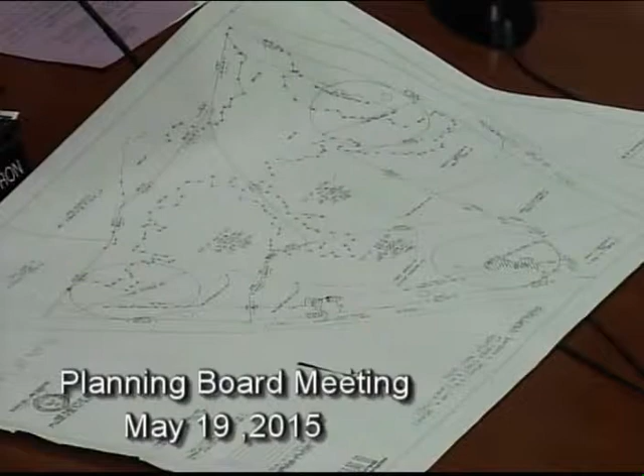No, you've looked at this already, right? Yes. Haven't you? No, this is in the subdivision, isn't it? This lot over here, isn't that what they're putting, are they planning on having a building lot there? No, is that what this is? That's on Massachusetts Avenue — let me just get my orientation, sorry, Steve. Lot 1, lot 3, lot 4.

Yeah, lot 4 is a building lot. But they've got it located within Mass Ave, I think, within Christina Estates, is that right? Yes. Well, Christina Estates, when it was written up, has a restriction as to how many can be built there. So I don't know if you can add another lot to an existing subdivision if it says exactly how many houses are allowed.

Here's a small view of it, John, here. So we'll have to check the Christina Estates restriction. Okay, yeah, we can do that.

So which lot are they trying to create? Are they breaking this up into 3 lots? Yeah. 3 lots? Yes. These 3 here? Yeah, 2 on Turner and 1 on Mass Ave. But unfortunately, the one on Mass Ave is within an existing subdivision that has a restriction as to the number of lots.

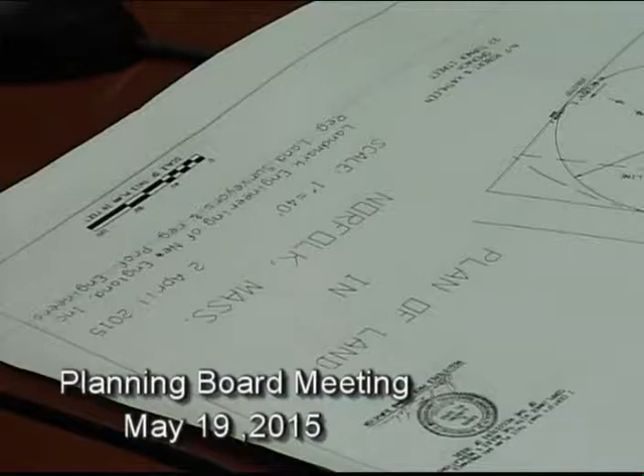As long as it meets the zoning dimensions, you look at this, it's conceivable you could pull a road in through here and put the buildable part in here. It's conceivable to do an estate lot. You could come off Turner Street with a road, just take a little sliver of lot number 2's property and get into lot number 4 from Turner Street, and put your circle up here. Yeah, you just need a driveway, you don't need a road. That's right, driveway.

And that looks like it might be outside Christina Estates as well. Although an estate lot has to be a certain size, what size does an estate lot have to be? Is it 3 times the existing zoning? Yeah, 3.91 acres. Well, this lot 4 is 355 right now, it says.

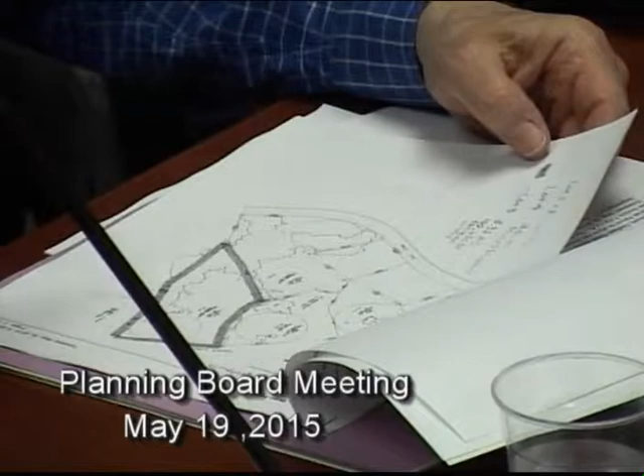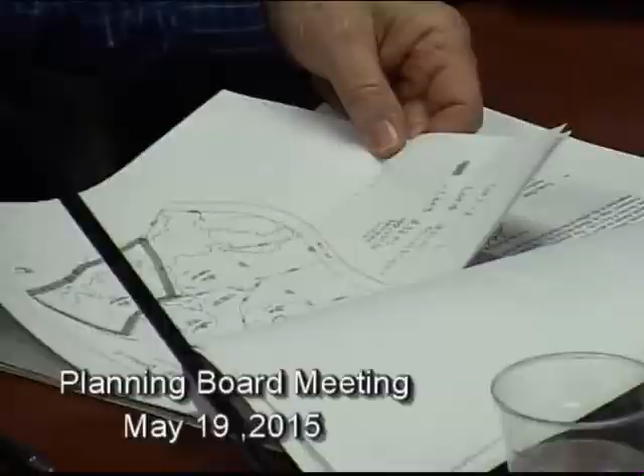Which one is this, different number? Which plot is the neighbor's land that wrote this? I'm not sure, they're in Christina Estates, aren't they? No, they're on different pages. They're on Turner Street. Oh, they're on Turner? No, Greaves is on Turner. Oh, they're on 40 Turner. Did you look at this plan, Ryan? I took a quick look at it. Oh, so they're across the street.

So this is the lot he's trying to create. This is 3.91.

How are you gonna get to this? Wait a minute, Walter, this is different than this plan. Well, this little plan we've got in the handout is different than this guy here, because he's only got 3 lots counting the house on it, and this one's got 4 counting the house, so I don't understand. You see this lot here? Oh yeah, he's got 3 on Turner Street. It's missing off this plan. So I don't know which of these plans to go by here.

I imagine the ones we have in front of us are the most current. What were Gino's comments on it? This is what the neighbor sent, that plan. That's the plan that was submitted.

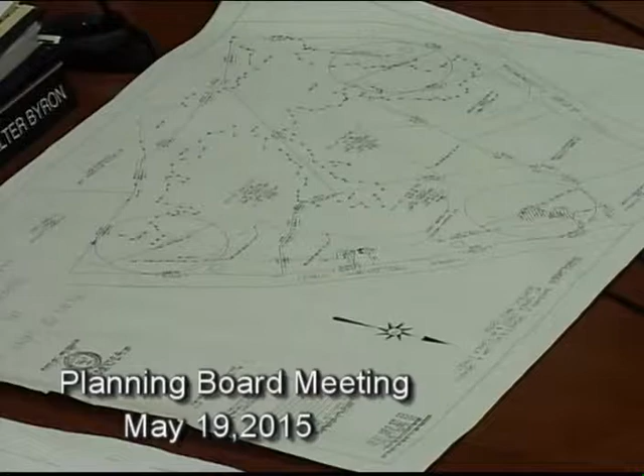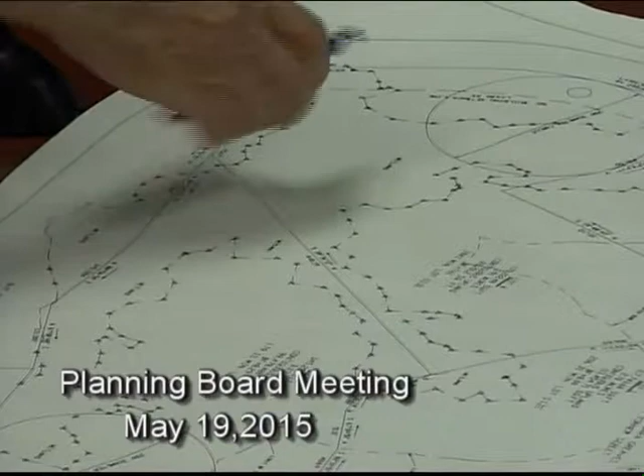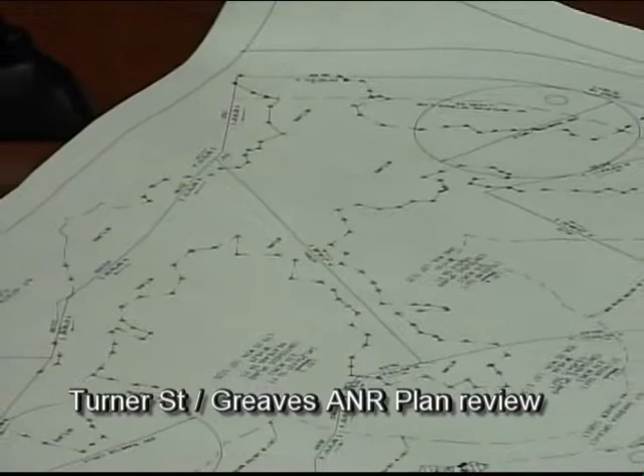No, right along the road, there's where it says 50-foot building setback line. That swath there is up front here, because in the center there it says wetland. Come back towards you, that way. Right in here, this is all wetland. Yes, but this is a buffer zone, look at this. Isn't this the buffer zone that you're gonna stay out of? Well, you can work in it, but with permission. But that buffer zone certainly extends from there out to the street. Yeah, you would think. Just looking at it by scaling this building setback line, it looks like the building setback line is probably going to be similar to where the 50-foot no-build line is right there in that section.

Still, he's able to apply to see if he can get a permit. I'd like to hold off on this and look at the plan a little bit more carefully, and check the subdivision rules and see if a lot is allowed, and check into the comments from the neighbor, Mr. Martin, and see where the open space actually is that he's speaking of.

Timothy Martin and Mary Ellen Hurley.

That's the only other thing raised by the neighbor, about Turner Street, and he's talking about having to widen the street. I guess I'm not understanding why that would be necessary, given this plan. There's already been work done on Turner Street as a result of the Fern Ridge subdivision, up to a certain point.

So do you think that's valid? Martin's big concern is the catalpa tree, which is right on the corner. The road butts right up against the tree. Those are the folks with the barn. The road makes a sort of a left-hand bend on Turner Street, and they live on the right-hand side, and they've got a catalpa tree right up against the edge of the pavement. Their concern is having to take that tree down if the road ever gets widened.

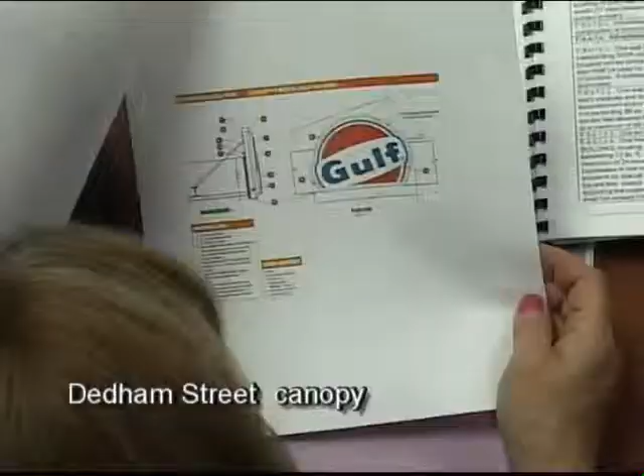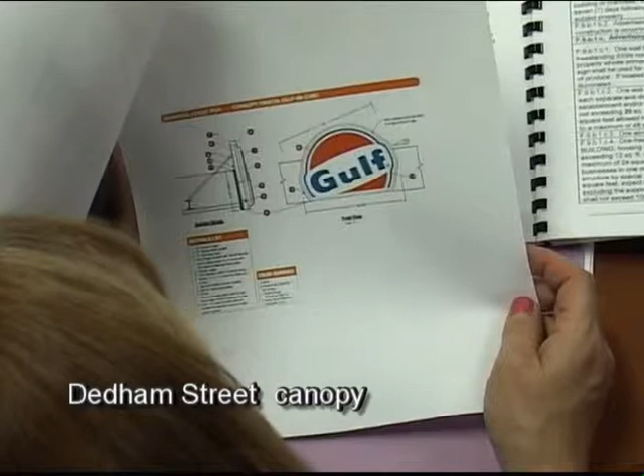7 by... oh, that's right, you can't calculate the circle, it has to be calculated as a rectangle, on the outside edges. So approximately 7 by 5, about 35, a little bit less. Did you have a special permit hearing for the size of the sign? Is it larger than 24 square feet? I don't think so, it's 6'11" by 4'10". I did 7 by 5 and got 35, let me do 6'10" by 4.

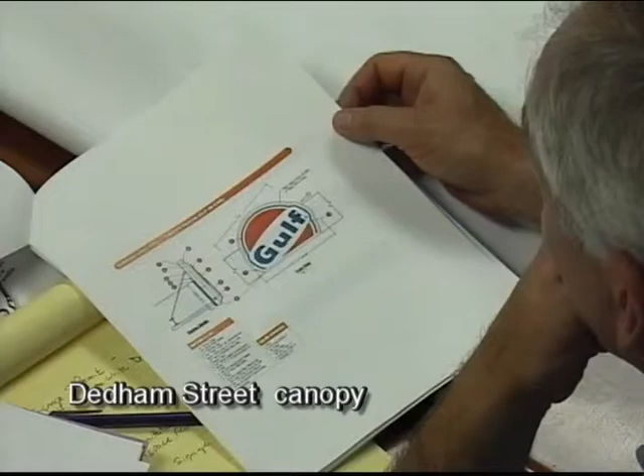I think they made it with whatever the standard Gulf logo size is for all Gulf gas stations. But we don't calculate circles using pi r squared for area, we calculate it with the box drawn around the circle, so it's 33 square feet. You're allowed 24 square feet by right, but it turns out it's 33, so unfortunately you'd need a special permit for something larger than 24 square feet. They may have calculated it using the formula for a circle, I'm not sure, I haven't done it. We just got this today, so I'm not too sure.

I think you addressed it as a canopy when we originally looked at it, and there happened to be a sign on the canopy on each corner. I don't know that it was this, but we didn't have the separate dimensions of the sign. I think you had something - I remember seeing that circle thing that they had.

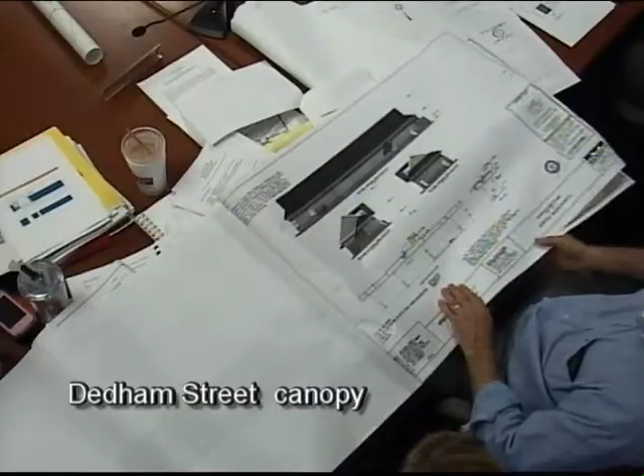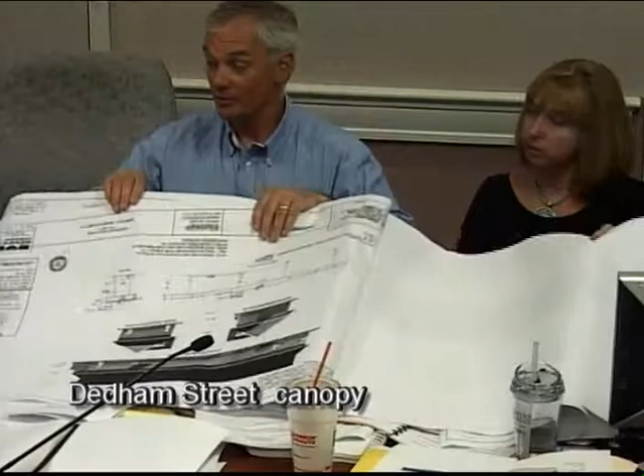On both sides? I would assume, yeah, it says the end view. This same sign here? It's similar, yeah, not as pretty as that one. On the canopy or the building? It's on the canopy, so it's in the center of the canopy. I don't really remember it.

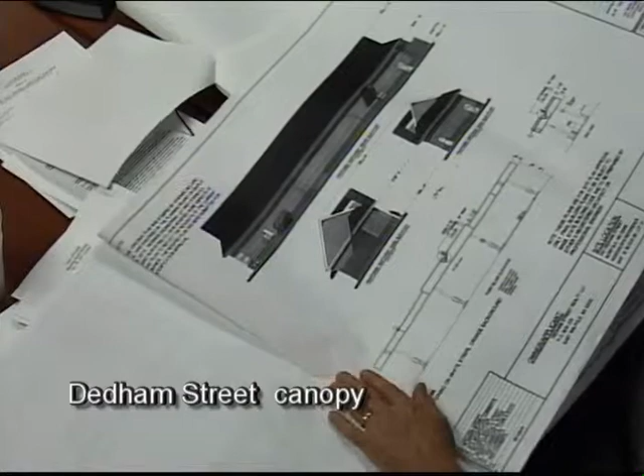The end view, that faces the other roadway, right? Yeah, because I think you're allowed a building sign if your building faces two roads - you can have a building sign on each, facing each roadway. I think that's what the zoning says, doesn't it? Okay, well we'll make sure we're clear on that when we have the hearing for the sign on the logo, on the canopy.

Okay, what's approved on that plan? This is, like I said, the 24 square foot Gulf sign logo, 24 inches high. Does it say Gulf logo or does it say Golf? It says Gulf, okay, yeah, it's not as pretty as that one, like I said.

So right now that's approved on both roadways? That's what was approved, yeah - it just has the Gulf signs on it. But can we see? Yeah, but they're smaller than those. Is it within the 24 square feet, or is it 27? Yeah, we'll just have them do that - we'll have them do that size.

Wait a minute, this says 24-inch high lettering, not 24-inch high sign. Sign is 27 square feet. Lettering is 24 inches high. And this definitely has to be facing the other roadway. Right.

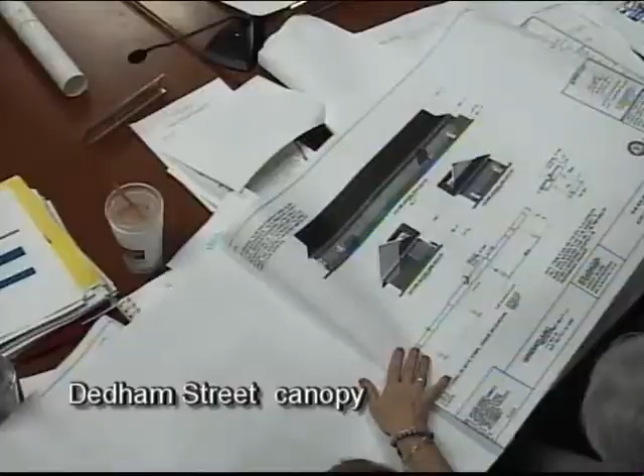Yep, that'll all be blue. Okay, just have you what's approved then. Yeah, so it's essentially the only thing we're omitting is the cloud and the orange stripe, and the rest of the canopy. It won't be that 33 square feet, it'll be what's showing on that. Yeah, whatever we approve, we have to deal with.

Can they put them in with a formal application, or does this count? Well, they've already got that approved. But they didn't approve the canopy band with the cloud. What canopy band? Oh, no, that's not on the drawings. Right, but so to approve it, what do we have to do?

Well, we are going to have to clarify the signage, that it doesn't have it, and we'll do that with a memo, because we're not going to open this up just to add that. But we are going to have a memo that says the cloud imagery is not going to be on the canopy. And we really haven't had a hearing on this - we really should open up some sort of hearing to be able to make a decision on this. I think at the last meeting you had, you left it with: come back to us and tell us if you want the cloud.

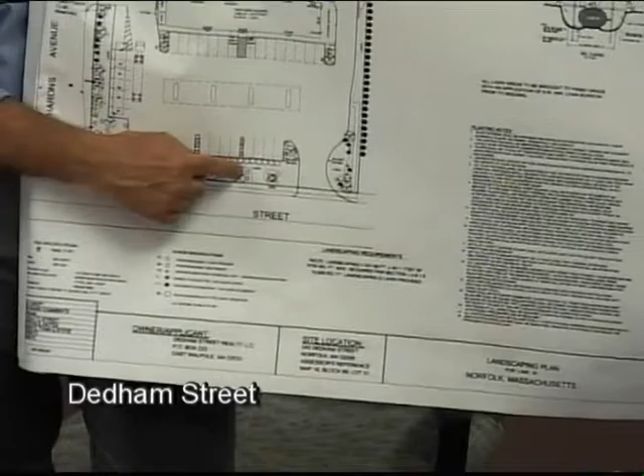Okay, that was one. What was the other? Let me hold it up and point. The other one's on the right side grading, please. The parking area - there was a landscaping strip in the center. Oh, that was landscaping, they had stuff planted in there.

You guys can tell why - the spaces are tighter and plowing would just be a nightmare. So it's landscaped on either side in the center, and whatever landscaping wasn't there, we're just gonna add in the front so it goes up.

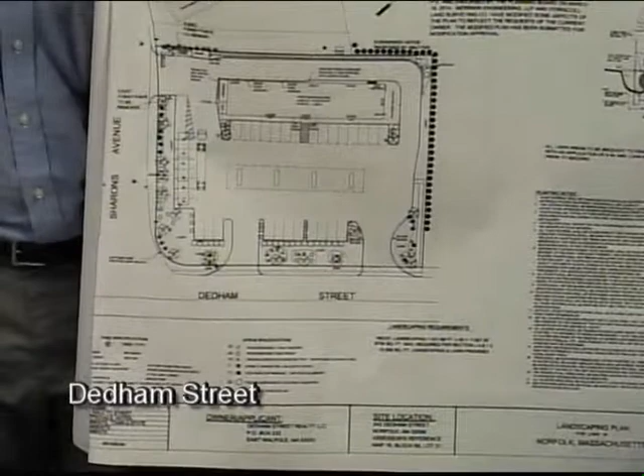And then the other issue was the sidewalk prep on the side there - on this side. I guess they were having trouble with the grading, it was pretty steep. So what's the solution? Well, they wanted to get rid of the sidewalk, and I suggested to the builder that they rough grade it with the sidewalk prepped, and then let Ray or somebody go take a look at it to see if the grading really is that bad.

If the grading is steep but not overwhelming, you can always put riprap in there rather than grass seed. You're not constructing the sidewalk, is that correct? Or are you? No - it talks about a gravel base, does it?

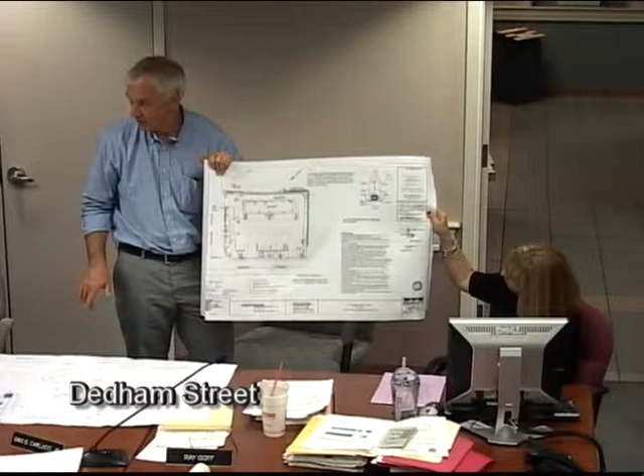Yeah, it's a gravel base. There's two different sidewalk issues - one along this strip here, and that was for the future, to put a gravel base. That was by request of the DPW director. On this sidewalk, I'm not sure what the impetus was other than to get people - I think, right, because there's no sidewalk across the front, so if people were going there, they wanted them entering at the corner and not walking down the driveway. Okay, that's the rationale for that.

Wasn't that sidewalk there when we were trying to connect the two properties? That access road was eliminated after we decided not to put the stairway or whatever it was that was going to link the two parcels. So what you're saying is the sidewalk on the side should stay? Yeah, it should stay because we wanted to keep people off the driveways.

So you should probably just have the builder grade that, see what it looks like, and maybe we can put something in with lower grass there so it doesn't run off. I think that's what it is, that's what he's gonna do. Because we figured that if there's pedestrian traffic, most of it would be coming from the lower direction.

What was the other one, was that it? Just those two things? One more - we did have one more thing. There was a reason for that landscaping strip in the middle, I can't remember what, further back. Probably just DRB. But reflecting on this winter and the amount of snow, I can see where it would just get trashed from plowing, ruined. I'd rather have more planting out in the front - agreed.

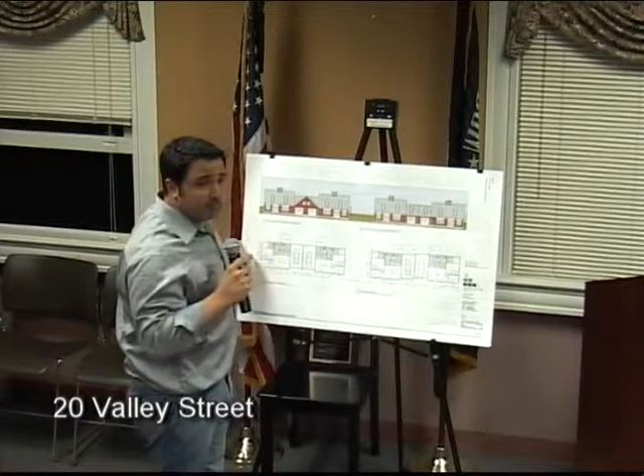Okay, if you want to identify yourself for the people at home. Good evening, Jamie Bissonette from Prime Engineering, for the record.

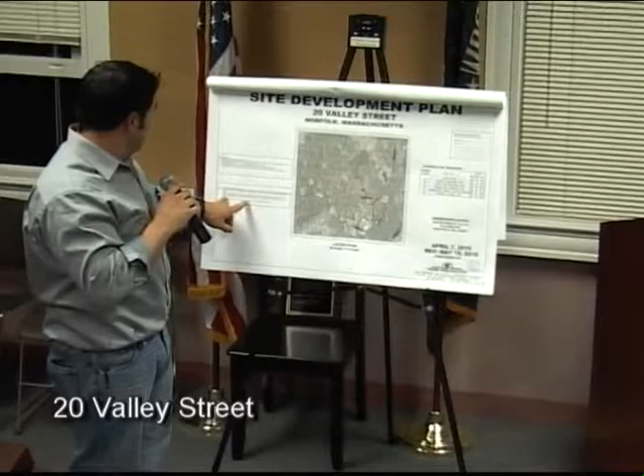All right, exactly as you've just heard, we're before you tonight for a special permit for a PMLD on Valley Street at number 20. The project is located pretty close to the Dedham Valley Street corner on the westerly side of Valley Street. I didn't hear if any of the additional waivers we requested were read in, but if not, I can go over those with you. We've asked for a waiver requiring existing buildings shown on adjacent tracts within 100 feet, a waiver requiring street lighting, a waiver requiring stormwater drainage designed to 25 and 100-year storm, and waivers from section 4 and 5 because we're not constructing a roadway.

All right, with that out of the way, what we have is a 10-acre plus or minus parcel on the westerly side of Valley Street. I know that Al has been in front of the board and spoken with the planner, and we've been in front of conservation, and all signs pointed to the PMLD being utilized here. What we've come up with is 4 duplex units sitting on the lot.

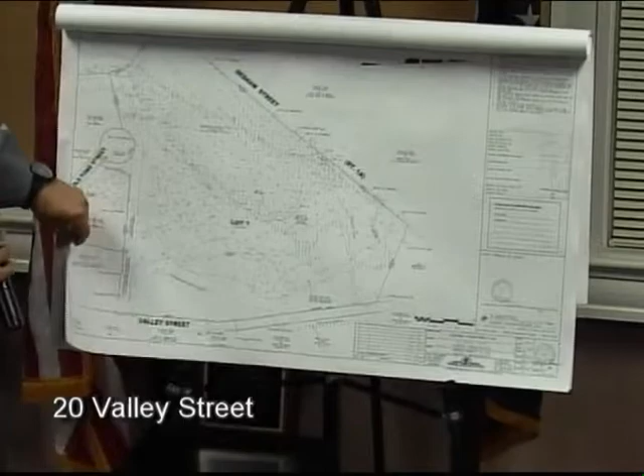Could you turn that just a little bit more? Sure, I don't think you can see it at all. Is that better? I've got copies of the site plan. Do you want me to grab some for you? That might be a little bit more helpful.

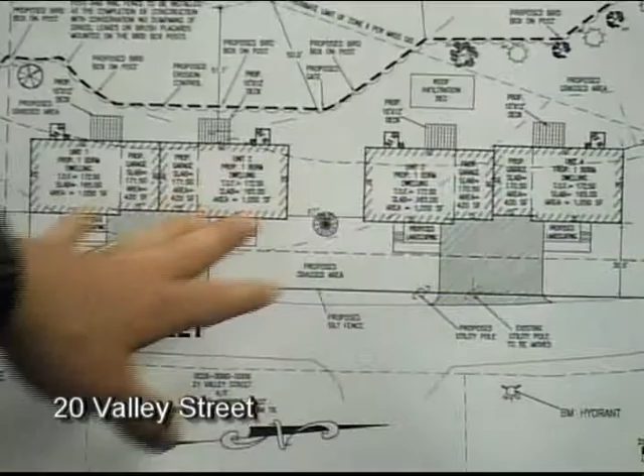They're 1-bedroom units, so there will be 4 total bedrooms. They're ranch style, but they kind of have a cape style look to the dwelling. Each one has a 1-car garage with capacity for 2 additional off-street parking spaces in front.

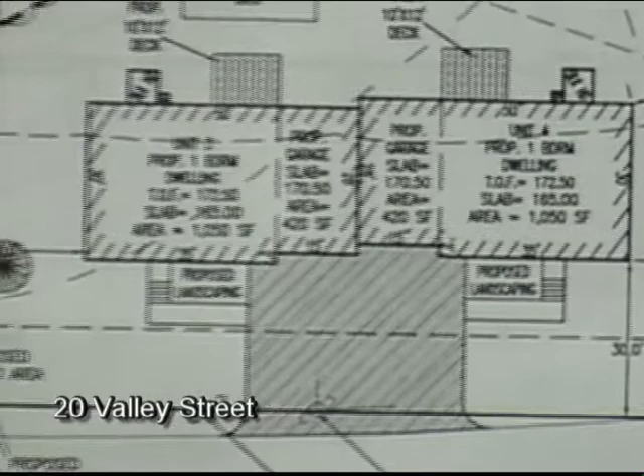It's going to be serviced by municipal water. DPW has asked us to revise our plan from having the water service in the back to connecting to the main on Valley Street, so we'll have water coming in to the front.

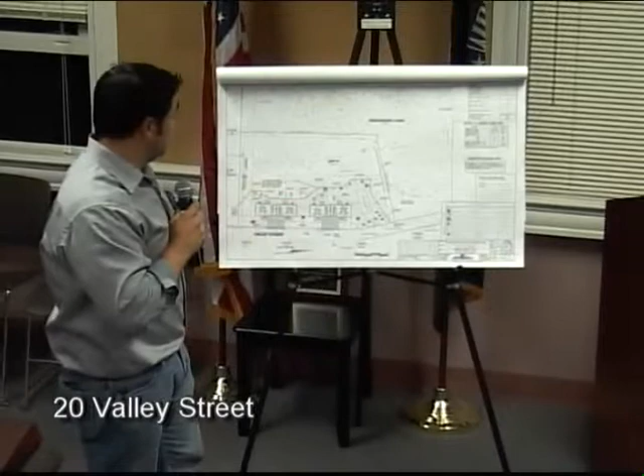We have our septic tanks proposed in the front, going to a system for all 4 units over here. As part of our design, we're infiltrating the roofs up to and including the 2-year storm. Everything beyond that overflows and goes over the grass, which I think is in reasonable accordance with your regulations.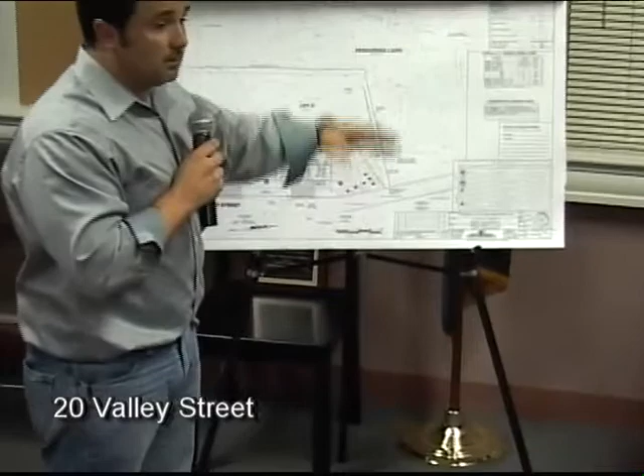We've provided some mitigation on site, utilizing a lot of the planning board required street trees, pin oak and red maple. Since the initial review by Beta and by the former planner, we've also added a couple additional street trees and flip-flopped our high bush blueberries with another shrub over here to increase site visibility for oncoming traffic and for getting out of the driveways.

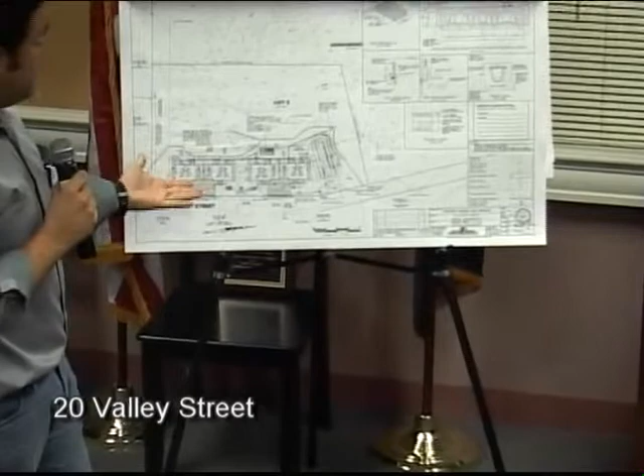In all, there's not a tremendous amount to talk about on the site. It's really 4 1-bedroom units in 2 duplex styles, similar to a Form A plan. Since the original filing, we've added trench drains in the driveway and brought those over to grass swales for discharge on both sides to keep the water out of Valley Street itself.

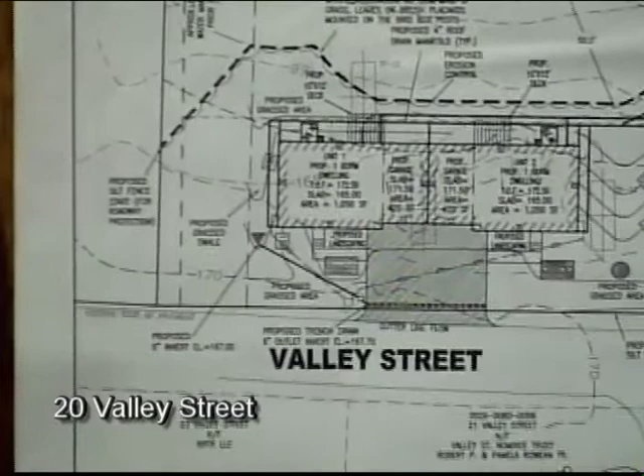I'm more than happy to entertain any questions that you may have. As a catch-up question for my own guys here, how did we end up with one lot and it's a PMLD? I don't quite understand that, so just help educate me.

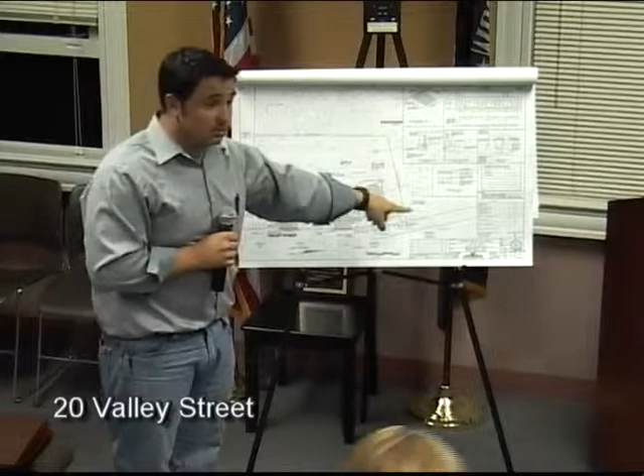Sure, would you like me to explain? What we have is, I believe, a Form A plan that was turned in. I believe it's probably that Mylar right there, but I'm not positive. And what we're looking to do is, if the special permit's granted, we're looking to Form A out this piece to go along with that special permit for that 80,000+ square foot requirement.

It's my own ignorance, but that doesn't help me, because we've got 1 lot and we're talking about a planned multi-lot development. I don't understand. What was the reason you put the Lot 2 section in there? I'm sorry, we broke the lot up into two lots, lot 1 and 2. Why don't you tell Walter, I think he's looking for the reason why you separated that into two lots.

Was that for the PMLD requirements? Well, the PMLD requires at least 80,000 square feet, so we did the subdivision for the 80,000 square foot minimum here. We do have the multi-lot, but our interpretation of the PMLD wasn't that you had to subdivide each one into individual lots -- you had to show that you could, in the intent. So we meet all of the residential requirements square footage-wise, setbacks-wise, and everything else. So this ends up yielding what we feel is the most favorable layout.

And what's the intention for the future for Lot 2? Actually, I don't think there is a clear intention right now, is there, Al? I mean, the majority of it's resource area, you know.

So I think normally we would see that sequence of thought process presented to us, where we would see the traditional lot layouts that then prove that the PMLD is the best choice. I think that's the one piece that's sort of missing -- jumping to the conclusion without showing that logic. I'm sure you did it and thought it through, but it just takes us a little bit longer to get up to speed and understand the logic of the sequence. You know, for a buildable lot, what percentage has to be upland on the lot for zoning?

So maybe you could talk through some of the reasons why you think this is advantageous to a more traditional lots, 4 lots or? I think it's the overall disturbance on the site. Obviously, we know this is a somewhat valuable resource regarding wetland area, forest area, et cetera, so we're trying to minimize the overall spread of the footprint.

This project was brought before the board some months ago, in very preliminary fashion, and at that time there were 6 units, as I recall, not 4. What happened, Al? Why did it change? I couldn't fit the septic system in for that many units and keep the 50-foot setback.

Are you all done with your questions, Michelle? I think so. I'm just trying to read through some of the engineering comments too, so it might be helpful to get their input at some point. We should hear what the engineering comments are, as a matter of fact, that way we won't miss anything.

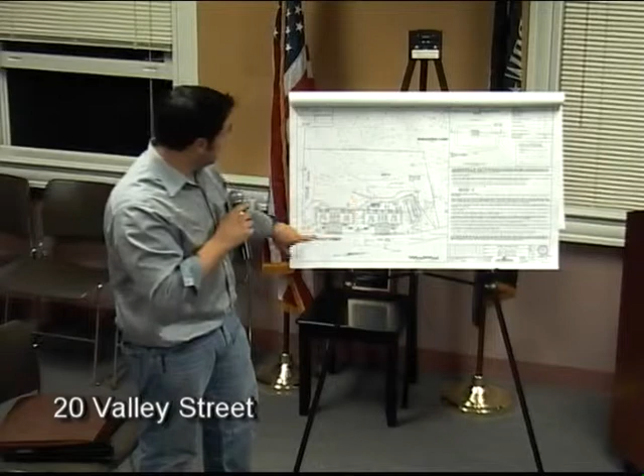Sure. Well, first, on the erosion part itself, what we've done on the erosion control plan is added large letters where we're going to stop the silt sock and start silt fence. Silt fence is much easier to move to allow entrance in and off of the site, as opposed to silt sock, and that runs all the way along, encompassing the entire work area, so we will have something surrounding the entire area of disturbance. As far as the construction entrance, go back 2 plans.

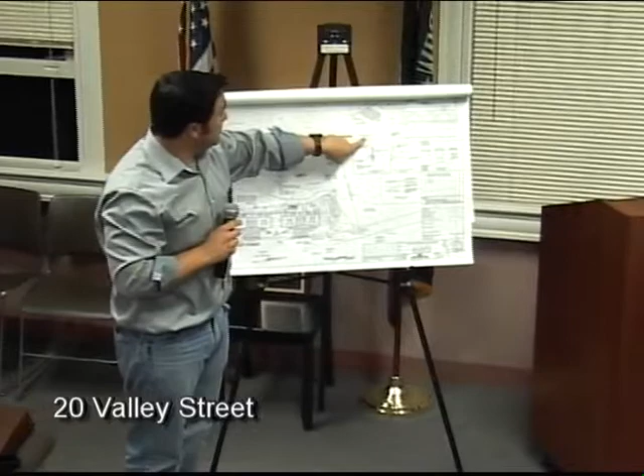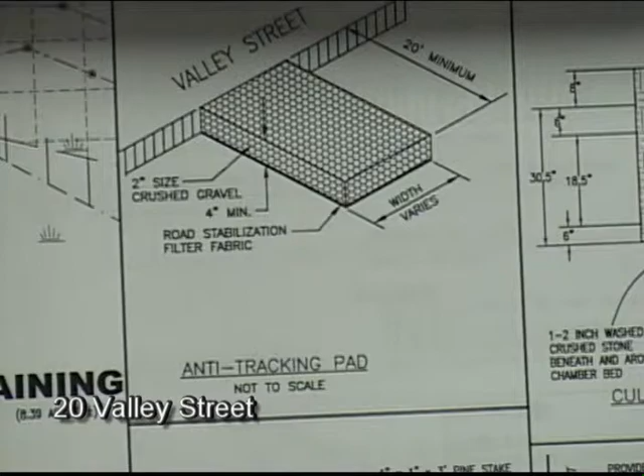I tried keeping it at minimum amount of sheets as I could. We've added a few details: silt fence for the front, and also an anti-tracking pad, which we use mostly for commercial sites, but I understand the need for it here, so we've added it on. Basically, it needs to be a minimum of 20 feet coming in for the construction entrance, which should be suitable for any trucks coming on site to stay on that area. We don't expect much mud, it's a pretty sandy site, and we're limited to the high portion of the site for construction work, but this should handle what we need.

As I said, everything else was fine, except one more item on waste removal. You're proposing municipal curbside pickup - is that available? Or is it private? It's private, yeah, available through a subscription. That's what we would take advantage of, hiring some kind of private entity.

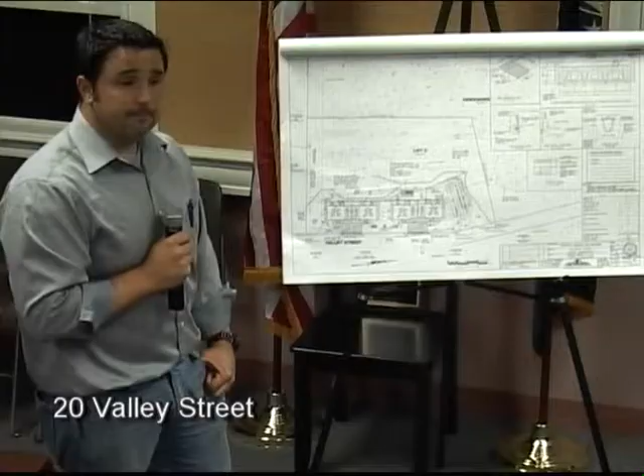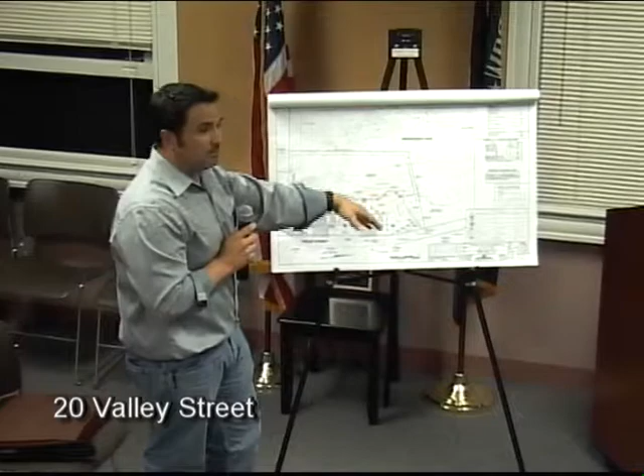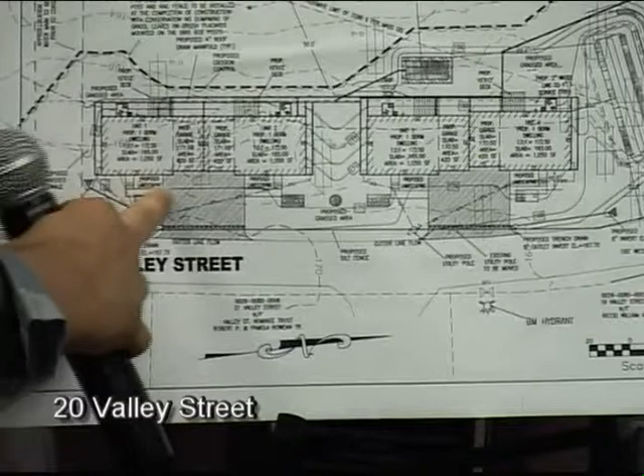Now, on your landscaping plan, why aren't you putting in street trees? What is it, street trees are supposed to be every 35 feet, is that right? Sure, and to keep the plans from getting too cluttered, I broke them apart by layout - landscaping and then grading. We place these on the computer at my office where I can see all the different layers between grading, septic tank, water, electric. If you flip to the next page, look at how busy the site already is because of infrastructure. We have drainage lines running here, septic tanks with pipes running underneath, pump chambers, underground electric which is required. There's very little room to put these trees, so we put them where we could fit them.

Well, I think you should try to accommodate some street trees. I don't want a complete bare spot along the roadway there. You're going to have to accommodate street trees. And you want them every 30 feet? Well, whatever the zoning requires, I think it's every 35. What's the frontage?

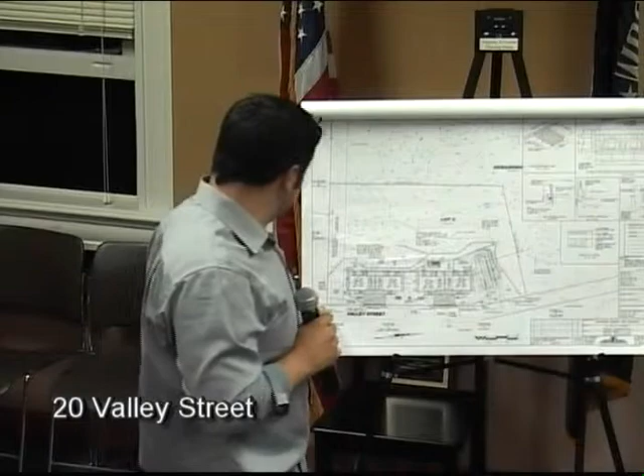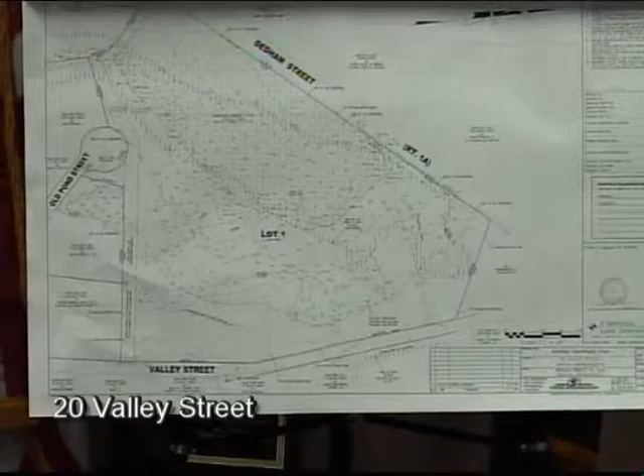We have somewhere around 350, close to 10 trees - 8, 9, 10, something like that, yeah. Well, they had one tree. We have 3. Three, they have three. These aren't in the right of way.

You actually - well, we have street trees in the right of way. Yeah, the right-of-way doesn't have any, the pavement comes right up to - oh, okay, yeah. Well, get them as close as you can, get them out where it would be reasonable.

Now, the engineer's concerns were sight visibility. Yeah, the driveway's on a curve. We wanted to be able to preserve a sight shelf. We had taller plants, they can plant around it, yep. So make sure you don't have a tree with low branches.

Yeah, what you're asking is a cooperative effort to locate those trees. Yes, you don't want to have a big bare spot along a roadway just because they put in some new houses. Would the board be amenable to the same number of trees, but clustered in areas that made sense? When I say clustered, not so tight they choke themselves out, but maybe a group of three, then a space for sight visibility.

I mean, also if something is out of a design perspective it looks better, maybe - it depends on what the board comes up with, but we like our street trees here. Sure, so we want to make sure all streets get the same treatment as far as landscaping along the roadways. If you come up with something creative - I don't know how creative you can get - I'll have to talk to one of our landscape architects.

John, all set? I like those trees set between the buildings just to break up where the buildings are close together - I think that's a good spot for them. Well, they can put them in there too. Yeah, exactly.

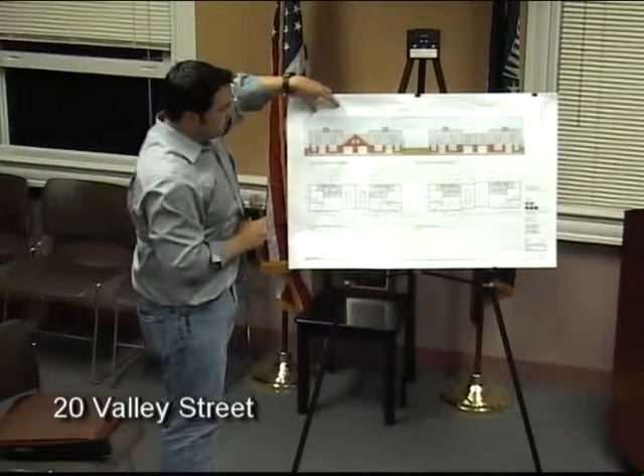Looks nice, it looks much better. The architectural plans look really nice as well. Initially these were 10 feet between the buildings, then 15 - but that looks much nicer now.

Some different roof lines on the garages, and you even staggered the building footprints between the garages here - that makes it look a lot nicer.

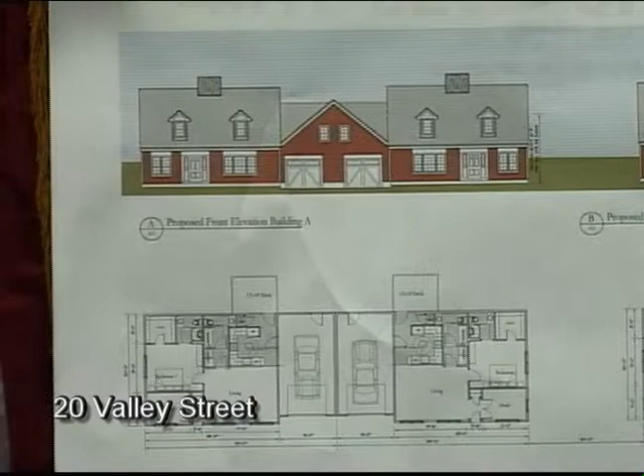Question for Al, just for information, not pertinent to the approval - is your intent for these to be market value homes? I was planning on renting. Renting, okay.

So I assume DRB hasn't seen the plans yet. I'm just curious, are those fake dormers on the roof lines, or a false dormer, fake chimney, false door? There's no second story - it's not going to be cathedral with light coming in that window. Makes it much nicer as an idea for an apartment.

It'll probably go to DRB, but what are you thinking on the exterior material - clapboard, shingle, or Hardie board, in a barn red brick, clapboard style or shingle style? Clapboard, you mean Pondville red? That's right.

Do you think it involves a chimney too, to break up the roof line? Looks nice, a little veneer.

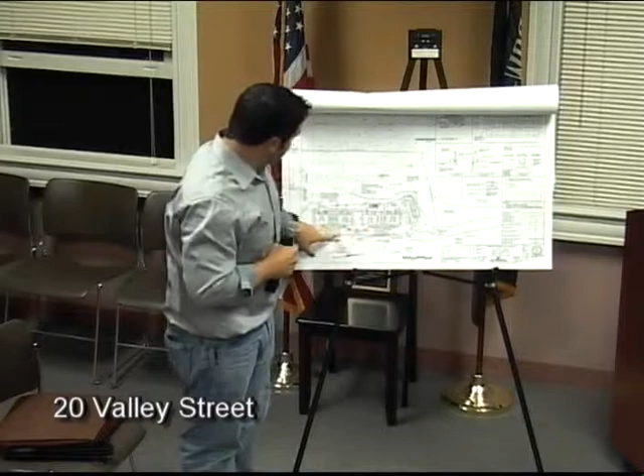The drainage for the driveways was a great idea, since conservation was also looking for where that driveway runoff is going - that's a super idea to mitigate it. The runoff goes to a grassy swale on the side, with a grate across the driveway that picks it up. There's a trench drain across each driveway with a 6-inch pipe that spreads out to a level spreader in the grass swale. Good idea.

I just don't see anything else - I wanted to mention the question about design review. This isn't actually subject to design review because it's a residential project, though they can go if they want to. There's no lighting or roadway issue we have to worry about.

I don't see anything else - we could probably close tonight. Want us to close tonight? Okay. Yes, we're going to hear from the public now.

I love the buildings, I really do, and I think the section in the middle, the garage, is... Elizabeth Whitney, 26 Valley Street. Oh nice, the button's on.

Hello? No, we have another one? Usually I hit stuff when it doesn't work, sometimes that helps, banging on my hand. I don't need a mic. You know, we can put men on the moon, but they never can get these things to work. It's the batteries. We haven't had a man on the moon in 40 years.

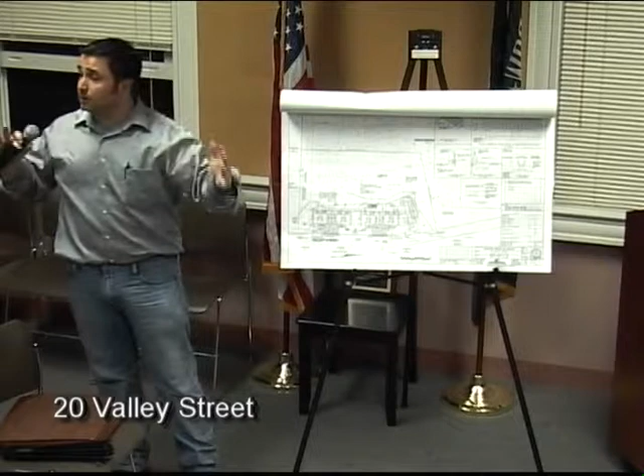On the left side, the silt fence will go right up to our property line, and that's to keep... And then go down to the street? And run to the street and then along the front of the road. It's going to encompass the entire limit of work. So if there's rain, you won't have any washout onto the roadway or into the resource areas. That's great, and thank you for hearing my questions.

We've never had a project like this on Valley Street, and I really am very happy. I'm not allowed to talk to the applicant one-on-one, but if I could, I would say, great job, Al. I really - and I know it means a lot to you that I'm happy. So, I think that's it. Good. Oh, and the trees - I love the trees. That's great. Okay.

Okay, do we have a motion to close? After they close - make the motion, Steve? I move that we close the public hearing for 20 Valley Street, application for four single-family duplex-style dwellings. Second. All those in favor? Aye. All right.

Good, let's try - not too often that we have a residential that closes in one night. I know, good, thank you. Thank you, I think Walter did - try to keep it up then. You seconded? Who seconded? No, Judge. John did - I second it.

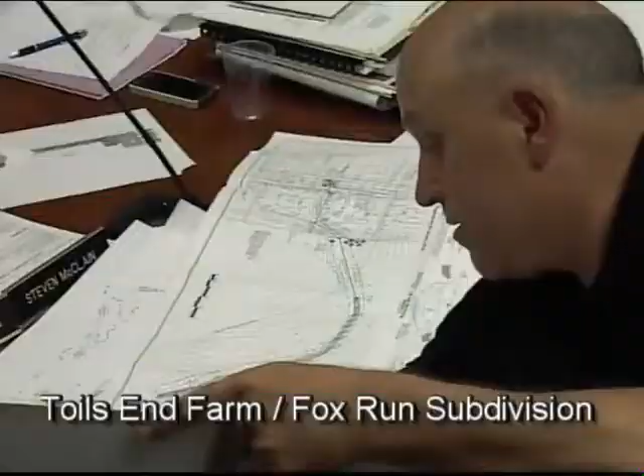So this is, this is Warren Avenue, Warren Drive right here. We're coming down the lot 82, 83 lot line, and we're going out into the open space here and down into this area here. It's dated April 6, 2015, and the last revision referenced here.

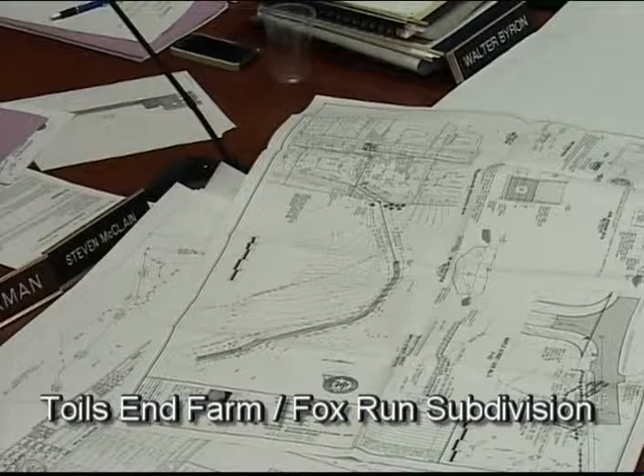5/15. You're saying the other drawing is the one that then changes lot 4 into a buildable lot versus what was originally drainage on the approved plan? So there's another drawing that shows that, if you recall, moved it down to where lot 68 and 60... Mark, do you have a reduced copy of that somewhere? I forget what number you assigned to that new lot you created. I called it 4A.

And that would be down in this area here. Mark has a copy of the plan. But lot 4, in the plans that we approved—now, this was before my time on the board, but my understanding through the history is lot 4 on the plans we approved was supposed to be a drainage basin.

Correct, so does there also have to be a plan changing lot 4? That's the one that's getting the conservation restriction. We're going to leave lot 4 the way it is, but on our plan it's shown as a drainage basin, so does it need to be changed to conservation? No, what I mean is, on our plan, it's shown as a house.

It's a house? Well, that was the problem. Does it need to be changed from a house lot to conservation? Yes, that's what they're doing. I think the condition in your approval, if you so chose, could say that lot 4 has been changed and now it needs a conservation restriction on it.

I think all these changes should be reflected in this modification. This is the plan that we submitted some time ago that showed the lots 4A being created here, increasing lots across there. So I remember seeing that, that's the plan we're referencing in the notes here. And then the third piece needs to be this conservation switch. So there's sort of three changes: there's the drainage portion, there's the lot portion, and then there's the conservation restriction—all have to go into this.

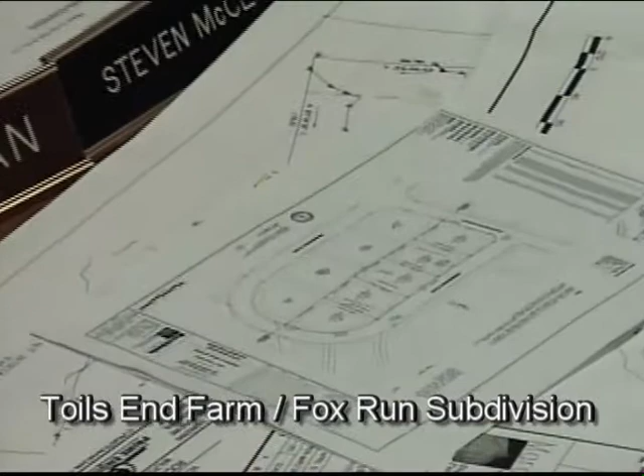Right? Now, do you want this signed before our next meeting? I mean, we can vote on this with these changes, and we can leave the document for people to come back and sign, if Betsy can get it done tomorrow or the day after, something like that. Well, we can sign this if what's attached gets changed, right?

So we can still sign the cover sheet, and change the attached document. Can I ask a question of the board? Yes, you may. Not having that signed, would the board be willing to entertain some lot releases?

Well, let's see now. I have no problem doing that. I want to move this along and get the drainage installed.

I suspect they're not gonna... we don't see any reason why we couldn't sign it, as long as the plan attached is going to be modified and listed with changes. We could sign it on our own free will, or we can vote on it now with the changes as amended.

If I may, the sooner you sign it, the sooner the appeal period can start. And then as soon as the appeal period is over, we can start the work. So that should be our mutual goal, to get the decision issued.

Is this all that has to change, what's attached? Is that true? Yes, I mean, there's a date I think that needs to be filled in, but no changes on the front, not just on the front. Okay, so we can vote it subject to whatever changes we've voted on for the attached. Is that correct? Yes.

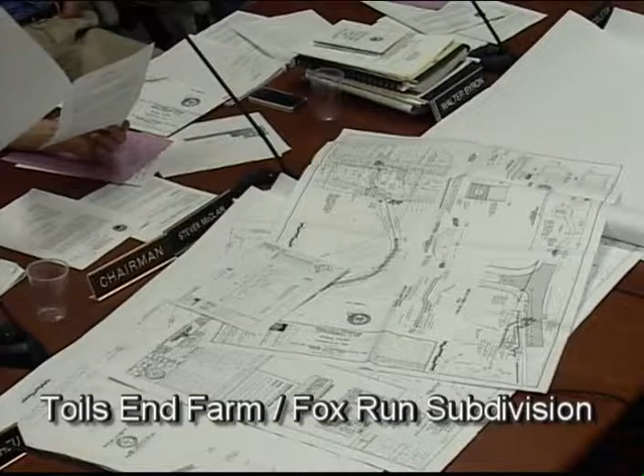Okay, so we can sign it tonight. Yeah, I'm willing to sign subject to us getting that attached sheet finished. Okay, does somebody want to make that motion?

Yeah, I move to approve - what am I asking here? Certificate of amendment, modification, or rescission of approval of a definitive subdivision plan - we're only doing the modification - dated May 19th, with the amended attachment to be prepared by the clerk for the board.

Incorporating the change in lots for Lot 4A, the conservation restriction being added to Lot 4, and the... what was the third thing? It's the drainage layout, which he already has. And the drainage layout, right.

One additional one the board may want to consider is the quitclaim deed and granted easements document that I worked with town counsel on. Yes, that should be added there too, sewer ownership and maintenance - that was important for the board.

That's separate from this vote though, isn't it? I think so. I just don't want it to get lost, because it's in your files now. Yeah, it wasn't really a modification. Would it hurt to put it in here though? I don't think it would hurt to put it in there, do you? No, okay, put it in.

And we can put that as part of the attachment also, just so that it covers you. So, okay, a motion was made - do we need a second? Do we have a second? Second. All those in favor? Aye. Aye. So now we can sign it.